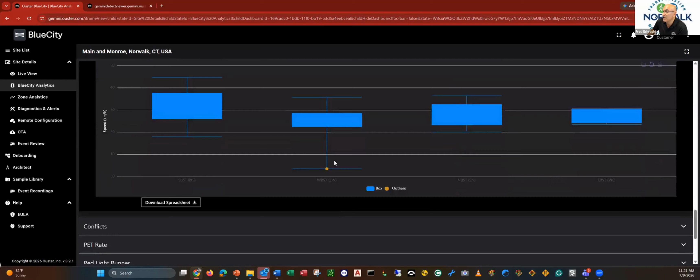The next one is the speed. So you can see the speed exactly in the same way that they provide the volume. You can get them at a different time, again different approach, and at different times there's a schedule in here, so you can just go back based on our understanding. So we installed this about 3 months ago, but as far as my understanding, I think we can go back for 1 year to get the data, maybe more. But this is not 100%, but that's as much as I know.

So the volume and speed is something that basically everybody knows. One of the things that we don't have in our detection system is the conflict. It shows the near misses. That's very important at the intersection. As you can see here, the near misses include pretty much everything. So we have vehicle to vehicle, and then we have non-vehicle versus vehicle. That non-vehicle could be pedestrian, could be bike, it could be any kind of road user that is just passing at the intersection. As you can see, we have so many different angles for the near misses in here.

Let me just show you a report. I am going to select this part. Yeah, it takes a little bit of time. All right, so there was the heat map, so I selected an area. Let's just pick the first one. This happened on 26/7/8 at 9:19. Let's just go. It's all recorded, so you can see it. All right, so this is a vehicle that passed by, and then the near miss. Let's see. All right, this is car with car. Let me just go back.

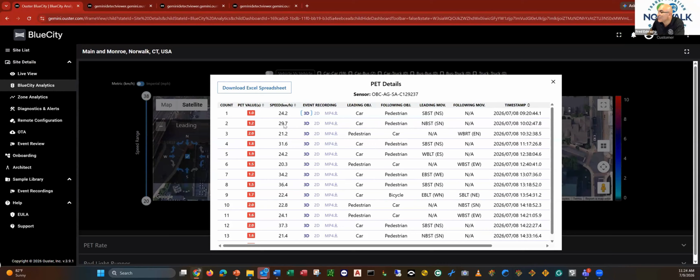I am going to take the vehicle with the pedestrian. Let's just focus on pedestrian vehicle. All right, this is southbound. This is car versus pedestrian. Let's see. This is the car, and that's the ped passing by. It goes back. Just look at it right here. You can see the car just come in, and then that's the ped right there. So that was the near miss that they provide. I can show you another one. Let's see. So you can see the speed of the object as well. So let's just go with this.

You have about 1 more minute, Fred. All right. I'm just going to show one more time. Yeah, perfect. Thank you.

All right. So this one, you can see it perfectly. Did you see, that's the near miss right there. It will show it again. Here is the car. It's just passing, and that's the ped. So you can see the near misses, and all of this information will be available, and then you can use it. If you have any project, you can definitely use these videos or recordings to show this is what's happening at the intersection.

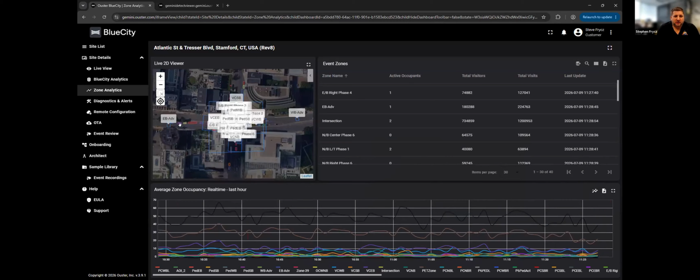There are other zone analytics as well that basically give you raw sensor data. And that is broken into approaches and phases based on what your zones are set up as. And you can get graphical printouts of basically the last hour. This will continue polling of live data. So as I scroll down here, it gives me all the information. And then I can always open that up and see it more.

There are a lot of diagnostics and alerts built in. So you can predetermine alerts, have everything built in. There's over-the-air updates, there's remote configuration. There is so much packed into this that we're still learning ourselves. So it's an ongoing process of trying to adapt new technology.

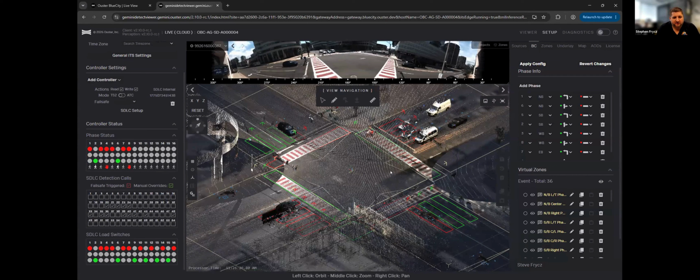As Fred mentioned before, this is a low res option of showing you a live intersection. So you can see pedestrians are actively walking into the zones. You can see all the vehicles and basically all the queuing. Another thing we really liked about this is if you go into the setup page and go into the zones, here you get live representation of our phase statuses, our detector statuses, and actually our load switches. So it's a lot easier for us to help troubleshoot remotely and help a technician in the field, or try to diagnose a problem remotely.

There's so much information that's embedded into the software, and we're still playing around with seeing how far this long range can see back and playing with newer zones. And as you can see, we're putting advanced detection zones further back just to see everything. You can see all the LiDAR points coming back in. It definitely gives us a lot more information than we're used to.

I haven't found anything it could not do yet. Every time I throw something at the LiDAR system, it's like, yeah, I could do that, we can figure out how to do that. So it really is growing with us. I think we have the issue of trying to adapt to what it could do, because so far there's nothing that I found that it couldn't do for the city. That's it for my end.

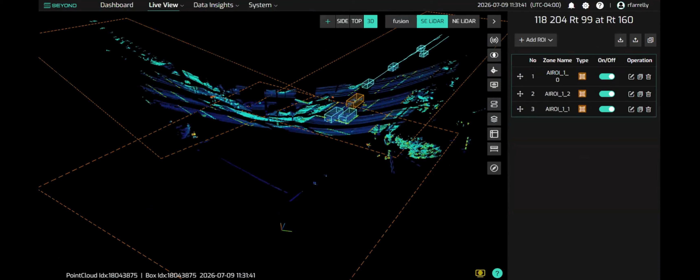Thank you, Stephen. All right, and we will turn it over to our DOT Signal Lab reps. Rob, I think you should probably go first, man. Sure, yeah. Thank you. All right.

So, up on my screen, I have what is not Ouster. It's still LiDAR. This is another group that we've been testing called Seyond, See Beyond. So we've been testing both Ouster and Seyond at the DOT. We have, I think, 5 Ouster sites at the moment and 1 site for Seyond. And since Fred and Stephen were so good to show you all about Ouster, we'll show you a bit about Seyond. First of all, what I'm showing you is not our entire intersection. This is only half of it.

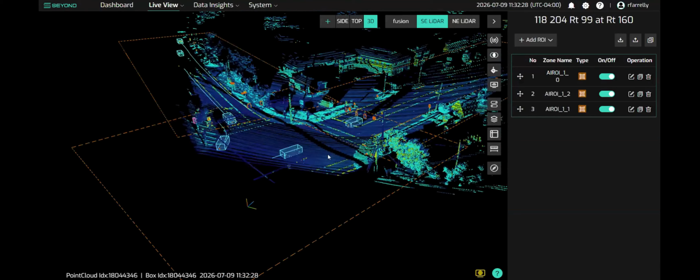What I'm showing you right now is one of our sensors, and I'm only showing one of them to contrast it with one of Ouster's sensors. Ouster has a 360 sensor. Meanwhile, our sensor right here is a 120-degree view. It's picking up two approaches, and it's actually getting out real far for one of our approaches.

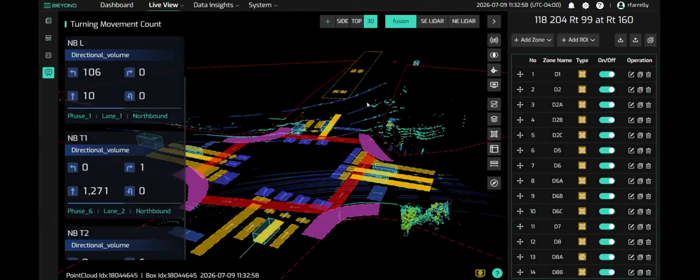So clicking over to our fusion of 2 sensors, now we have, similar to what you guys saw before, the full 3D view when it eventually comes in. So we have our full 3D view of the intersection. You see cars coming in and out. You see all of our zones.

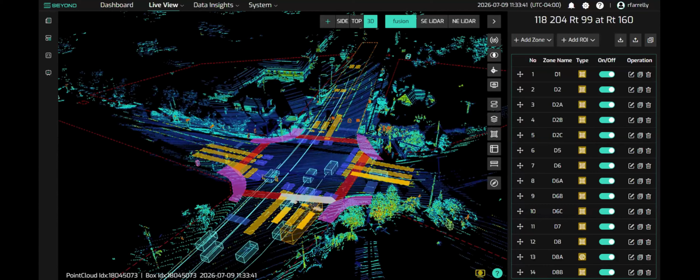We've been told at the lab that we are pretty ambitious with our zones. Right now we have, I think, 77. We created zones for this, that, and everything. With our view here, it differs a little bit from Ouster. I'm only going to give a couple more bits of contrast between Ouster and Seyond before I focus exclusively on Seyond. So some things you might notice are, first of all, the lack of color with Seyond.

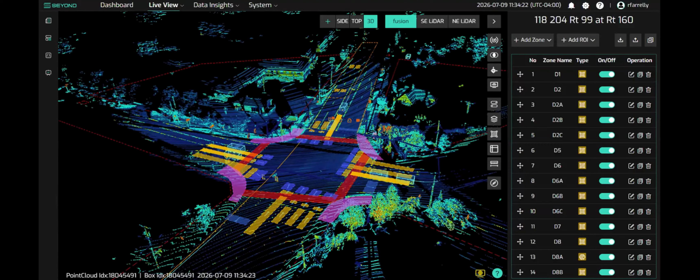With Seyond as well, you don't have the Google Map underlay. You might not have noticed on the previous LiDAR views because you have all the point cloud over it. Underneath there was a Google Map underlay, so that way you can try to align your sensors. With Seyond, you don't have that Google Map underlay, you don't have that color, because using those 2 things to align the sensors are really unnecessary, with Seyond at least.

With Seyond, when you first boot it up, you can do a fusion of these 2 sensors. So instead of just having them at 2 random points in space, the system will automatically fuse them together, and it even auto-populates some dummy zones that it notices cars are going in and out of this area in particular more often than not. So they'll put some dummy zones in. And most of the time, those zones aren't the way our plans are spec'd out, so you have to adjust them.

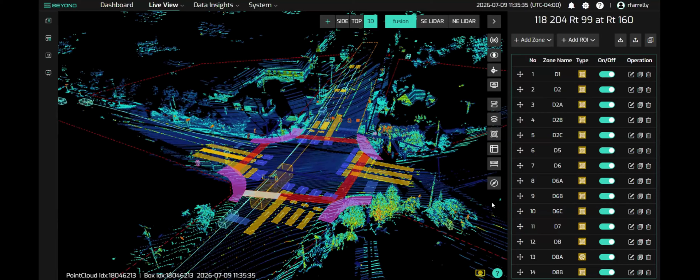But it is a really neat thing to do where you can just load it up, hook your sensors up, and when you go in, it just automatically configures everything. There's a lot of fine tuning on our end, so it's not you just plug it and walk away, but it is very interesting to have that.

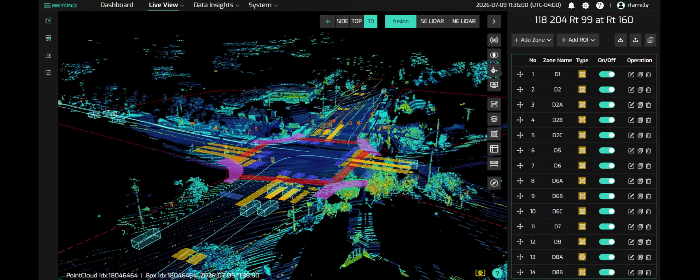Now, to talk more about Seyond and not contrast it to Ouster anymore, right now you have your live view of traffic. You see our zones being lit up when cars come into them. All of our yellow zones are our detection zones, so all of that is sending a call into the controller. We even have zones way out in the back. I think, yes, our furthest advanced detection zone is at 300 feet, so it's wonderful that I can be doing stop bar and advanced detection all in one go.

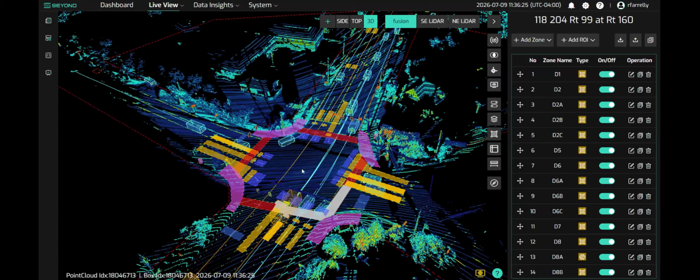The red and pink zones are for our pedestrian counts. We're playing around with that a little bit more, and possibly down the line looking at implementing pedestrian calls right from the LiDAR instead of having a push button, or rather in addition to having a push button.

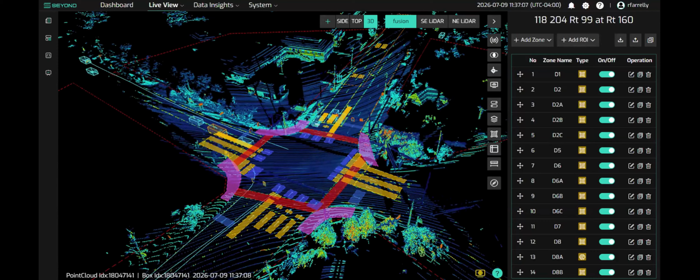We have these purple zones that are being used. We're starting to play around with red light running and getting recordings for that. Similar to what Fred showed, from this red light running, you can get a short clip in a 3D space. So when somebody runs a red light, you can actually view it and you can see how far after it changed to a red light that they ran it.

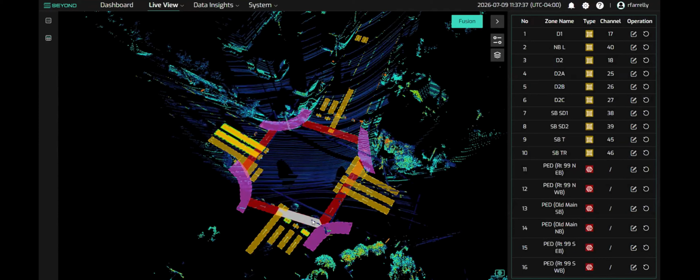And you have some pretty interesting clips of people just blowing a red light at 2 in the morning, or there are some, well, maybe not false calls, but calls of somebody that go through right after it turned red.

We also have our actuation screen, which is very similar to the last one, except it gives a more in-depth view of when calls are actually being placed. You can see when it lights up outlined in green, there's actually a call being put into the controller. Meanwhile, these whites are just showing that a car is going through that zone, because a car going through a crosswalk wouldn't be putting in any calls.

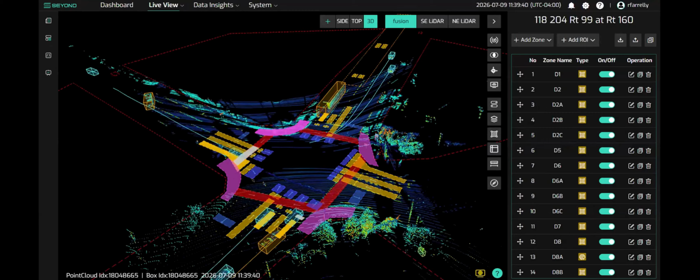We haven't established this yet, but we're playing around with setting up an API where if one of these sensors comes down, we'll actually get a notification. That way we won't have to just hope and pray that everything is up and just check every now and then. So we'll know ahead of time when it actually goes down.

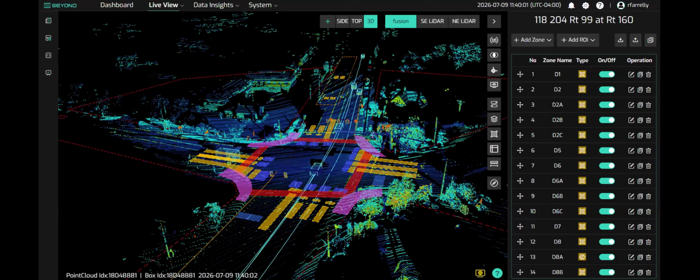I think that's actually just about all of the major bits of our Seyond system. And it's been chugging along for, I think, a couple weeks now since the last time we really went out there to adjust. And it's great with all of the LiDAR in general. You just plug it in, and once you get everything all set up, you just let it go. It's awesome to show people because everyone loves to see the 3D space made up of lasers, but it's really low maintenance once everything is chugging.

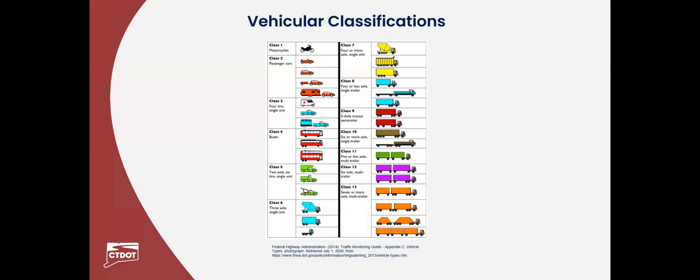So, to that point, this is from the federal DOT and how they classify all 13 vehicles, and this is an ongoing development with the LiDAR systems. Obviously, the goal would be to get all 13 and be able to do that accurately. Every day we're striving towards more and more information, more and more accuracy. So the LiDAR provides that, especially with the new sensors that are coming out and the use of AI to help develop products and the back end software.

So just as a summary, I wanted to point out a couple things with the LiDAR. With a camera system, you're setting up the camera. You can put it up on a pole, and with the 360 lens you're able to capture a certain radius or diameter of an image. Both of these companies use a minimum of 2 sensors, and the setup for it is typically on adjacent poles, steel span poles.

They're located between 13 and 18 feet, and they're both fairly lightweight, but having them on the span poles means that it's not whipping in the wind the same way that a camera will. And so you're always getting a very rigid, very sturdy, quote unquote image from the sensors.